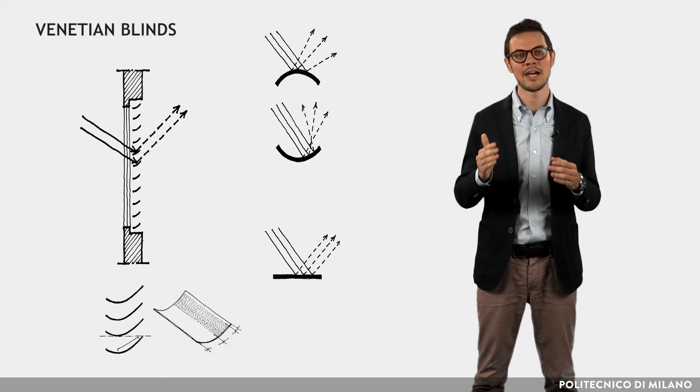By adjusting the inclination according to the position of the sun, the blades reflect the rays onto the ceiling, which must be light-colored, obtaining a diffuse illumination. Perforated blades with small holes, moreover, allow keeping inside a reasonable illumination level, even if they are completely shut, and some view outside.

A more advanced system consists in the so-called light shelf, which is a well-established way to facilitate the penetration of light into a room and to protect from direct glare. The light shelf is generally made of a horizontal shelf arranged on the outside and or inside of the windows in its upper part. The light shelf must be placed so as to avoid glare and maintain the view outside.

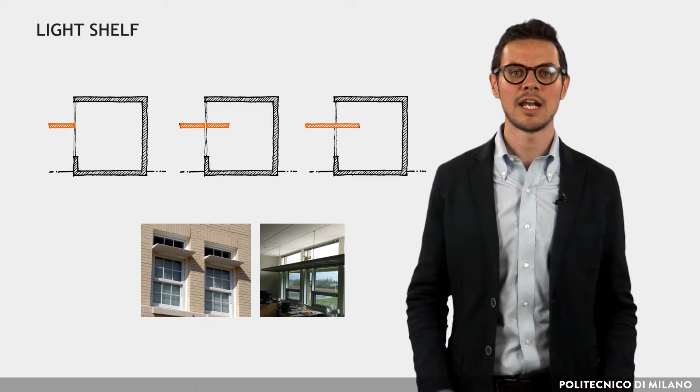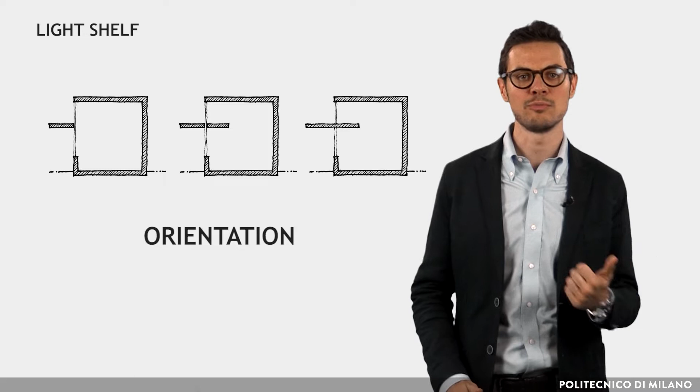Light shelves should be designed specifically for each orientation of the windows, room configuration and latitude. Orientation, position, type and depth of the light shelf is always a compromise between the needs of natural light and sun protection. The minimum depth of an external light shelf is determined by the shading requirements. For the interior light shelf, the limiting factor is instead the glare. The depth required is greater in the case of east and west facing facades, and it varies with the orientation.

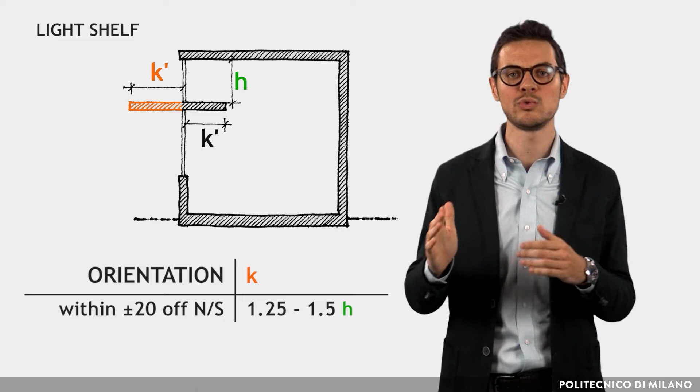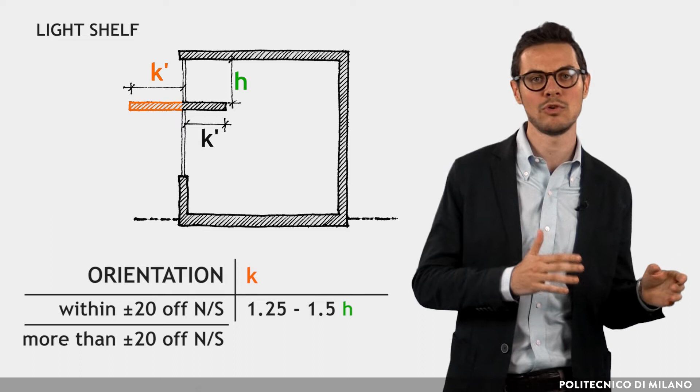In facades oriented within plus/minus 20 degrees of south or north near equatorial latitudes, the external light shelf should have a depth between 1.25 to 1.5 times the height of the ribbon windows above, while for more than plus/minus 20 degrees of south or north it should be extended between 1.5 to 2 times. For rooms facing south or north, according to the sun path, roughly the depth of the internal light shelf may be equal to the height of the ribbon windows above.

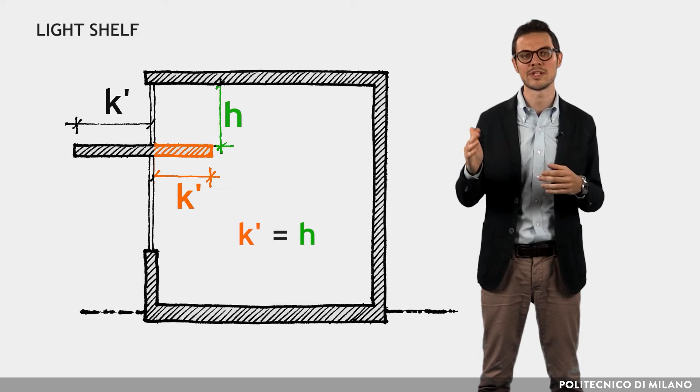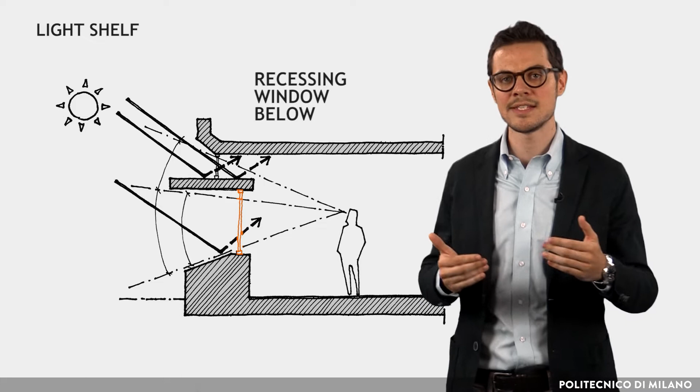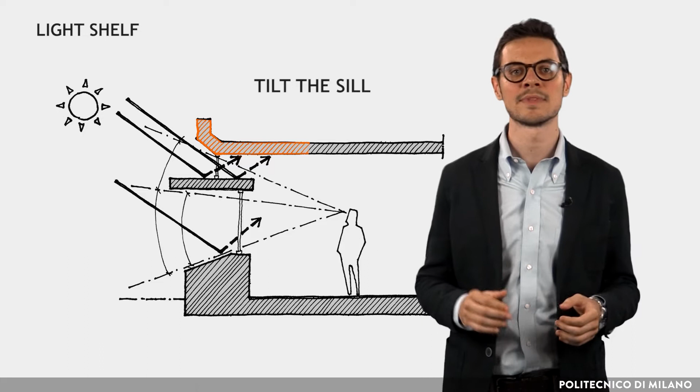If the optimum depth of the external light shelf is excessive in relation to the other needs, the same results can be obtained by recessing the windows below. With this type of solution, the contribution of natural light can be further increased by appropriately tilting the sill. The depth of the internal light shelf can be extended so as to always intercept the direct radiation through the windows above.

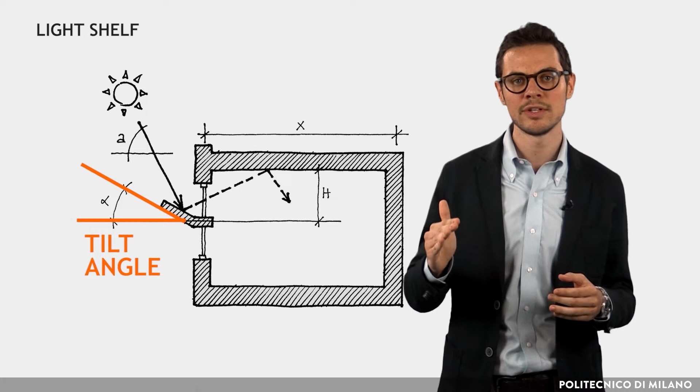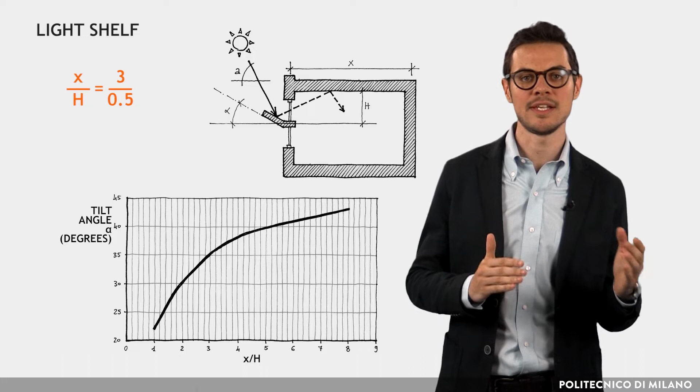At low latitudes, if the south or north facing light shelf is tilted upwards, the contribution of natural light increases, but the exterior part must be extended for providing satisfactory window shading. The optimum tilt angle at latitudes near the equator depends on the ratio of x over h. For example, if h is 0.5 meters and the width of the room x is 3 meters, the optimal tilt angle is almost equal to 40 degrees.

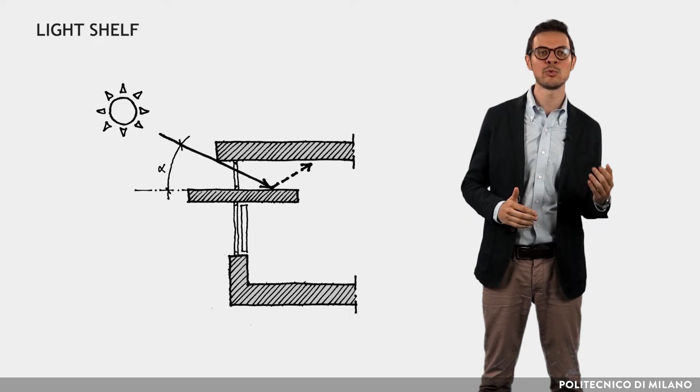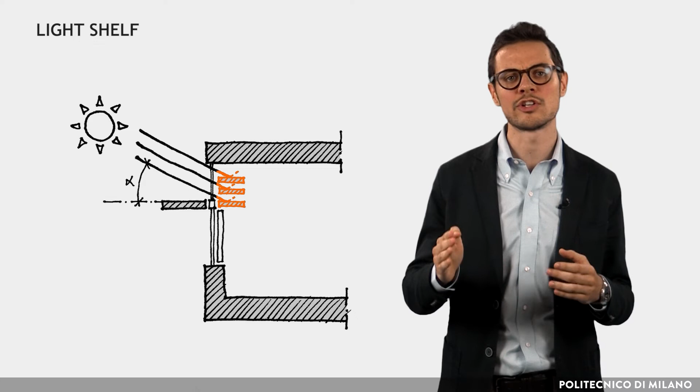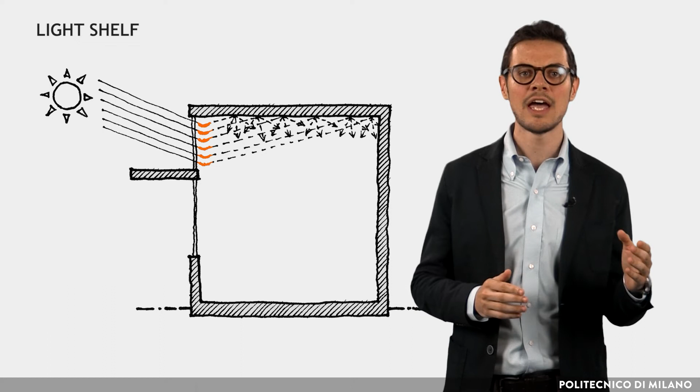The use of a light shelf allows natural lighting even when, to avoid glare, the glass area below is protected with a shading device. For southeast and southwest or northwest and northeast facing facades, the resulting depth of the inner shelf may be excessive. In this case, a series of smaller shelves, properly spaced, can be used. An alternative solution consists of reflective blades, fixed or mobile, on the inside or outside of the glass strip. In this case, the outer shelf has the sole function of solar protection for the underlying glass.

The effectiveness of natural lighting with a light shelf can be increased appropriately by curving the surface hit by the sun's rays. The characteristics of the upper surface of the light shelf determine its effectiveness, both in this and in all other configurations. The surface must be white or reflective, and periodic maintenance is necessary to avoid losing its features.

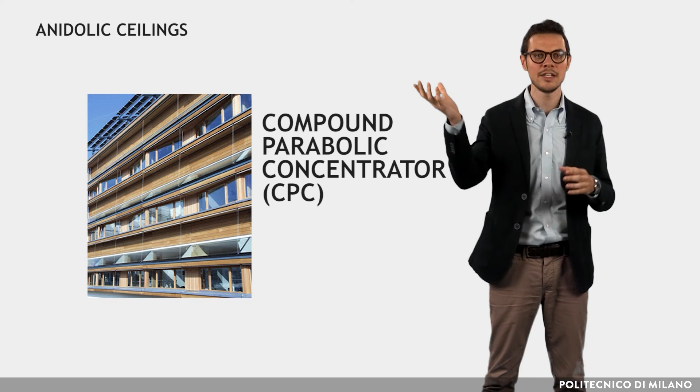Finally, systems with anidolic ceilings are based on non-imaging optics and take advantage of the optical properties of compound parabolic concentrators to collect the diffuse light from the sky and convey it into less illuminated parts of the room. Outside the building, an optical anidolic concentrator captures and focuses the scattered light coming from the highest part of the sky. A light pipe arranged in the ceiling carries the light to the back of the room.

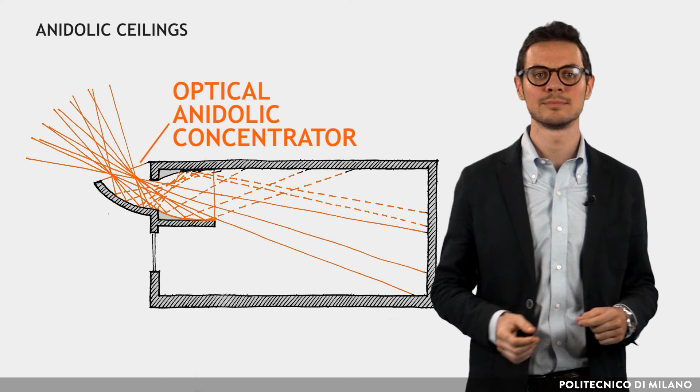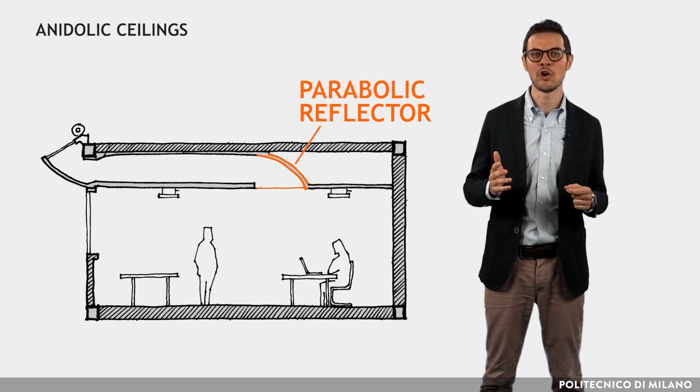In correspondence of the outlet of the duct, a parabolic reflector distributes light in the bottom. On a clear day, the penetration of direct sunlight can be controlled by roller blinds that unfold above the outer glass of the opening. Of course, after an initial preliminary design, it is advisable to optimize the described systems using simulation models, which is the only way to predict their effect and performance with reasonable accuracy.